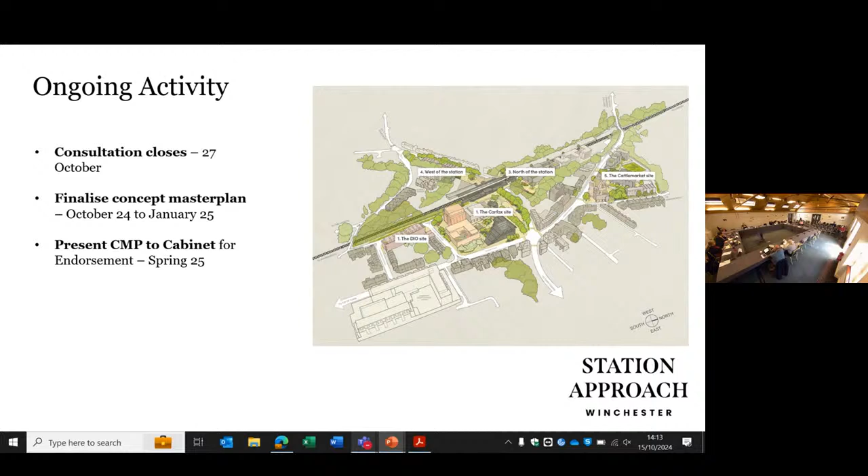So the consultation closes on the 27th of October. After that, we'll be taking full account of all the comments that have been made. I think we've had about 70 responses so far, and that was as of last week. We'll then be working with Design Engine to finalise the concept master plan in a format that will come forward via the planning team to a cabinet report for endorsement of the concept master plan in spring of 25.

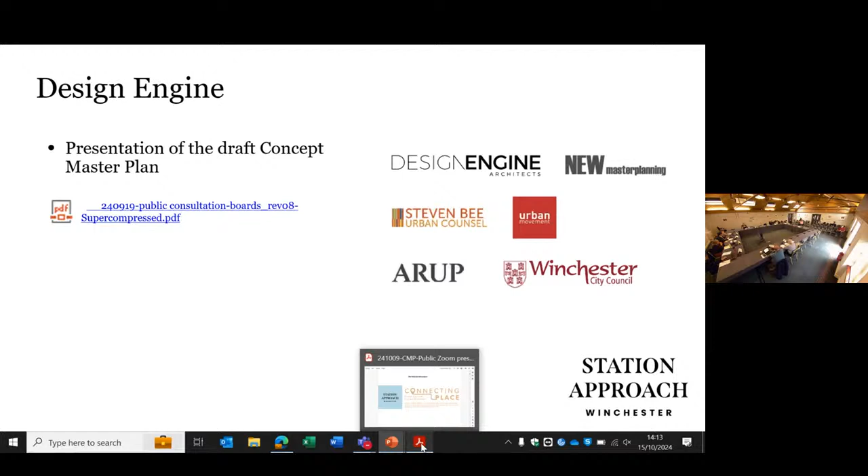Now I'd like to hand over to Oliver Moore from Design Engine Architects, who are the lead consultant. They are locally based, and I'm sure he can pick up on Councillor Lee's concerns and issues as well. Thank you.

Thank you, Ken. So I've got a set of slides on the screen here. This is effectively the same set of slides that were presented to the public Teams meeting just last week, so I'm going to skip over some of them since we've presented the baseline to this meeting before. So some of the background information in these earlier slides I can zip through.

The vision, though, I think the statement here is what this project is aiming to define: a connected place, a lively place to live, work and play, a welcoming gateway showcasing the nature of the city and beyond, and a sustainable travel hub. That, I think, is somewhat of a stretch goal compared to what the station area offers today.

This was capturing what's in the local plan. Some of those elements have been taken forward to inform that vision, but I won't go over that in this forum. And you are all familiar, I think, with the red line of the site and the areas within its demise and outside of its demise.

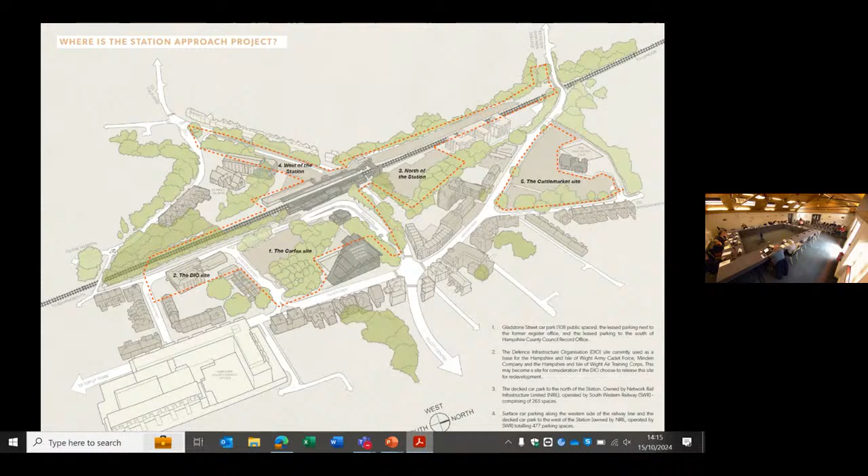What is a concept master plan? This was touched on in Councillor Lee's comments. It isn't a detailed design, it can't be for the sites. It is a broad framework, a set of development parameters and guidelines that will inform future detailed developments and future detailed planning applications, which will be subject to all the relevant scrutiny through the planning and development process as and when they come forward. It's also important that it sets a framework for the entire site, even though it's not able to define phasing or which parts of the site may come forward on which timelines.

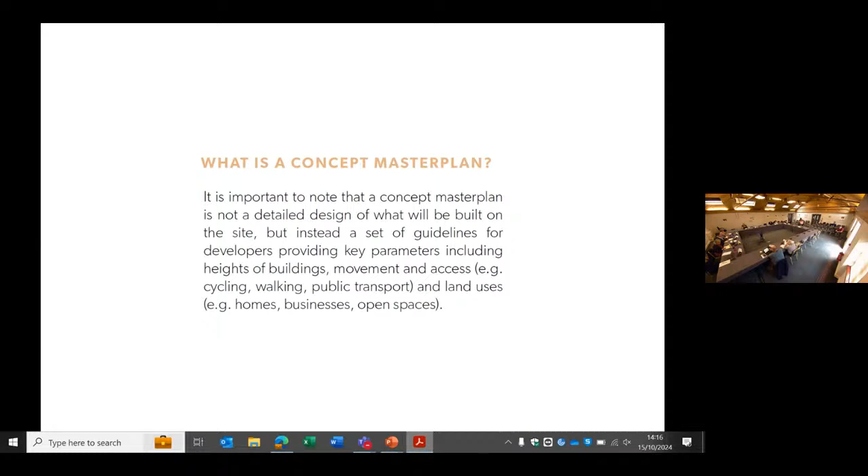That's subject to many other factors, such as viability, financial considerations and individual landowners' constraints moving forward. But it's something that sets a coherent aim for the whole area, which can hopefully be developed over time.

We didn't start from scratch. We continued work. As Ken said, the public consultation done back in 2022 sought, and received, over 90% approval for these four key development principles and the sub-principles beneath them. These have been our starting point for the themes and the proposals we present today.

A little bit of context, but I won't dwell on this. Obviously the station is in a key position within the city, more so today even than when it was created, when it was somewhat on the fringe of the city centre. It's now a key dividing location between where people live and where people travel into, in terms of the economic centre of the city. And obviously, notwithstanding COVID, there's increasing commuting in and out of the city to jobs elsewhere compared to when the station was built.

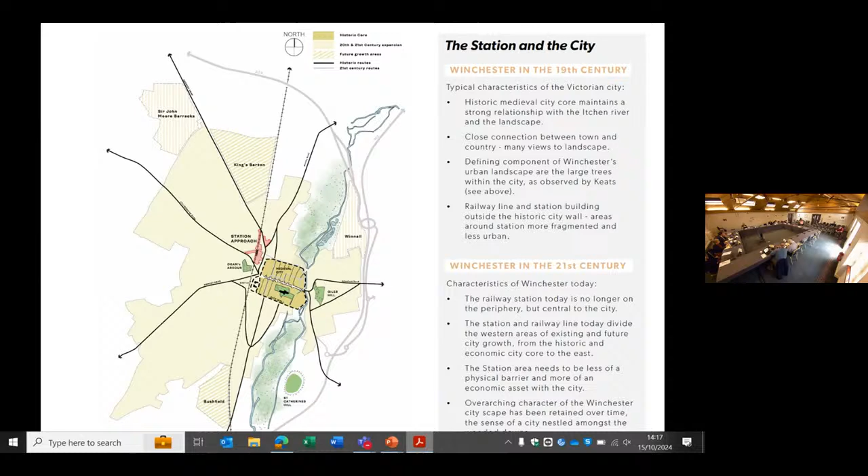Just going to pause on this one: the key characteristics of Winchester. This is something we've really drawn as inspiration for some of our town planning principles and the way we've laid out buildings and development on the site. It's not just Keats who's recognised this, but this is a quote we thought was quite apt and succinct. Winchester feels today, and it was observed in the past, as a town nestled amongst the landscape and natural environs, and that's a real key characteristic.

You look at many of its streets, some of the trees, some of the green spaces within the city, and that's something we want to identify - there are strengths and weaknesses within the existing site of the station approach area, but it's something we really want to reinforce. In doing so, we hope to reinforce that sense of what the nature of the city of Winchester is, and also simultaneously better knit this area, which isn't that characteristic of Winchester, into the city centre itself.

So, to the draft proposals of the concept master plan, organised around six key themes: arrival, the experience of arriving at the station, or arriving to or leaving Winchester for daily commuters, visitors, residents, and people new to the city.

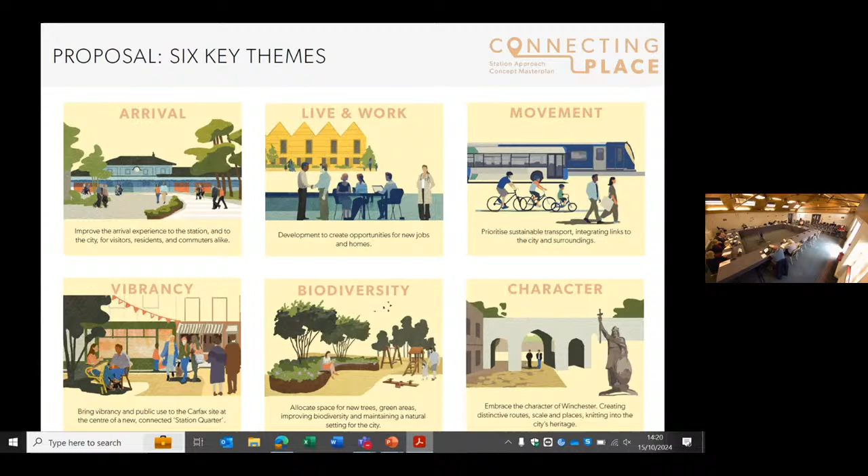So taking each of those in turn: the current experience of arriving into the station, I think we can agree, lacks some quality of experience and somewhat lacks identity. The number of times I've been asked, working and walking through the site on an almost daily basis — where's the city centre? How do I get to Winchester? Where do I find the cathedral? So arrival and orientation is clearly a key issue.

How are we addressing that? We've identified the key arrival points, the landing spaces if you like, and also the key routes that move beyond those and into the city or outwards into the local neighbourhoods.

So without going through this diagram, which is within the public consultation material you can find online — there are opportunities to enhance existing arrival spaces, and opportunities to create spaces where there probably isn't much identified space currently. I'm thinking about the west of the station, for example, where car parking and car movements have encroached. There really isn't much space there at all.

And again, in that vein, the northern area, where there's currently a viable route into the station for people to arrive and depart, but there's no sense of space or location there — you're walking through a multi-storey car park.

And there are other aspects on this diagram about routes that link to those, the quality of those routes, and some of the features along them.

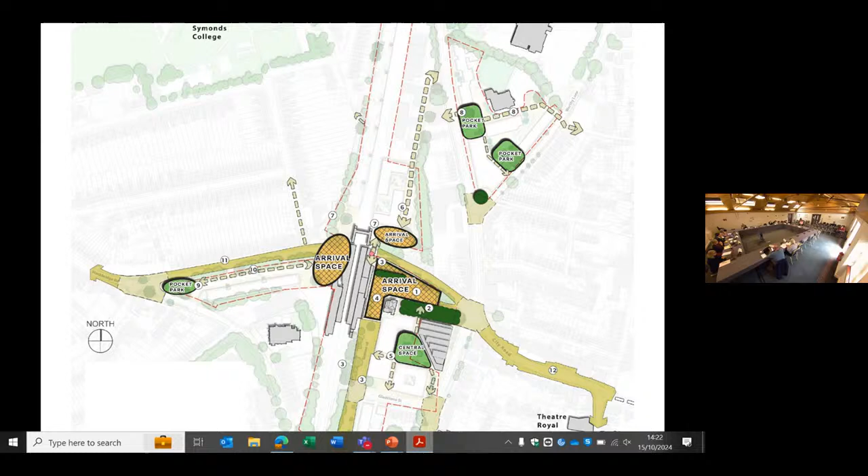And that goes for the Cattle Market site as well, which is somewhat of a green space vacuum. We can introduce new uses into those — I'll come back to this in the biodiversity slide — to better improve the amenity and the identity of those routes.

The emphasis would be shifted, as will be covered in the movement slide again in a minute, asking all the different user groups to take a step back, changing the priority of space here to be more pedestrian friendly, a more usable public space for pedestrians, limiting access for vehicles. Buses would be allowed on a shared surface with pedestrian priority. Taxis and other private vehicles would be redirected or contained elsewhere, not allowed to pass in front proximity of the station, creating potential space for more pedestrian friendly, civic and public use as an arrival space for Winchester, supported by reuse of new and existing buildings for cafe, bar use, and pop-up space. Any of those could be developed within the detailed principles for the site opposite on the Carfax.

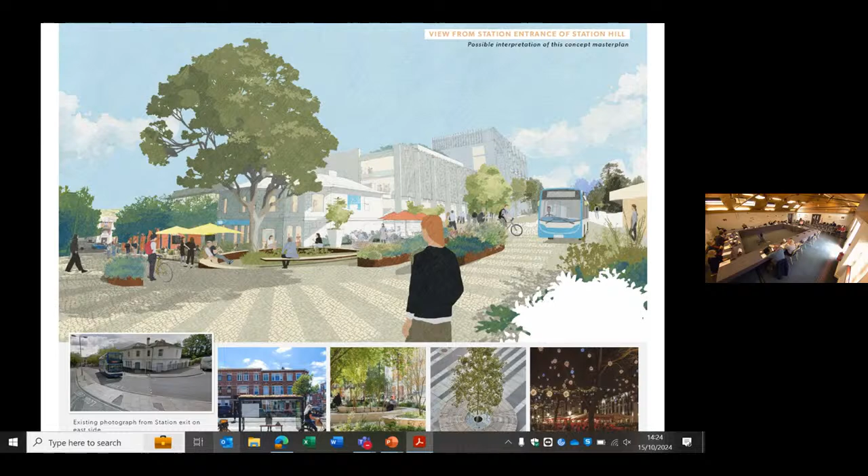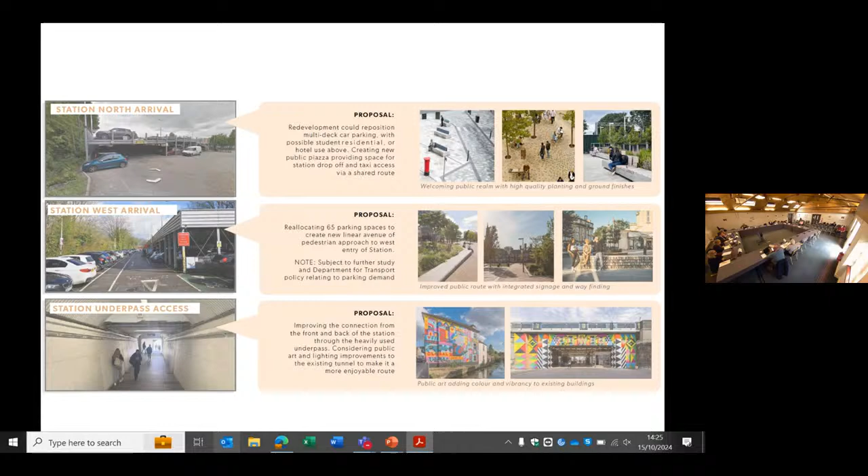We don't have visuals for all of the approaches, but there's a similar kind of principle for improving the quality of the other routes into the station - Station North through the car park, Station West through the surface car parking adjoining the multi-storey car park, and also routes through the site. The underpass for people moving across the station site has opportunities to be improved.

Live and work - this is land use effectively, and these sites are identified in the local plan as offering development opportunity for the benefit of the wider city, to bring value to the area with new flats, houses, and opportunities for different types of workspace. So how might that be best arranged on the site? These are the principles that we've developed.

Taking Carfax site as a beginning, there's opportunity for viable retail here, whether it's a convenience store facing the station, a cafe, a bar, or pop-up market space on Station Hill. There's opportunity for workspace too, being in such close proximity to the transport links and bus, making it a very accessible space for people to move to work.

Some element of residential may well be desirable on that site, but really I think it's the site one step further away - so residential opportunities on the site of the DIO, bordering Gladstone Street and Newburgh Street - in the fullness of time, very much dependent on Network Rail's car parking criteria and what opportunity they have or might evolve in future to reduce their car parking quantum.

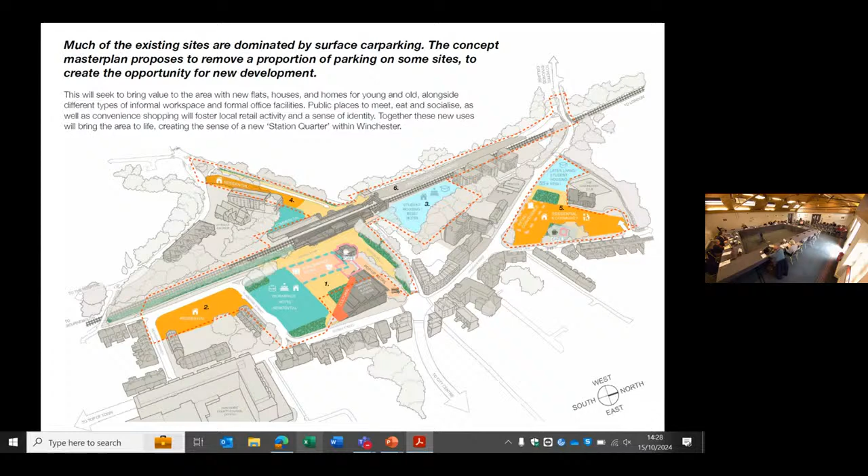Again, just the visuals - I won't dwell on this - but it shows that development along the Andover Road edge could offer a much improved access route into the station, both in terms of better framing the views in, creating the streetscape if you like, and the sense of coming into the city centre. I'll come on to this in the movement slide - setting back from the road in order to offer opportunity for better transport links.

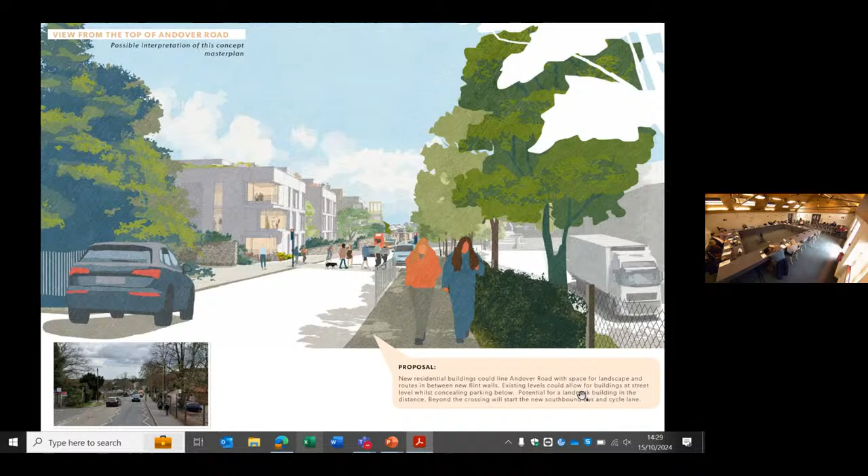A view of the site from the upper Andover Road area, looking back towards the Carfax site there.

This shows the improvement of the links, coming back to that arrival sequence - links running uphill from the station, pedestrian and cycle links through and over Upper High Street and down towards the Westgate. There's opportunity here with the red line, including the road, to widen some of the footways, improve cycling priority, and change some of the flow of cars in order to provide better, more accessible routes for people in terms of quality of space to get to the city centre.

Development, residential development shown on the right there on the DIO site, which could be in the form of flats, and potential office development in the area labelled A on the site, which shows the area of the Carfax site furthest away from other development at the moment and furthest away from the listed building of the records office. Might be an opportunity somewhere to increase mass.

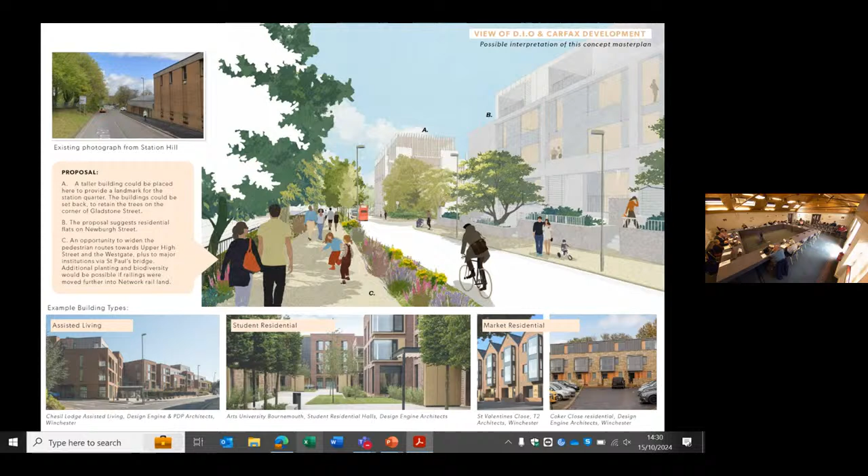Vibrancy is a key feature we'd be looking to inform the generation of a new station quarter, somewhere you don't just live or work, but somewhere people would dwell and stop and pause on their way to somewhere else, on the way through the city. Not a destination in itself per se, but something of a waypoint on people's routes, a reason to pause, and also in order to capitalise on some of the throughput of commuters and the economic potential of the area of the city.

This could be commercial use, but it can also be uses that are beneficial to the city. So we would suggest, prescribe, play parks, cultural uses, pocket parks, areas for public art, spaces for play, spaces for public amenity that might be open through the day and also into the evening.

All of this improves the dwell time on the site and the sense of safety and population, alongside the fact that there's opportunities for people to live and work there.

How these uses would be orientated on the site is quite key in terms of the identity of place and the sense of place. There's a diagram on the right here showing where the active facades would be, creating uses that look inward into the sites to create pedestrian friendly, car free spaces in the centre of developments.

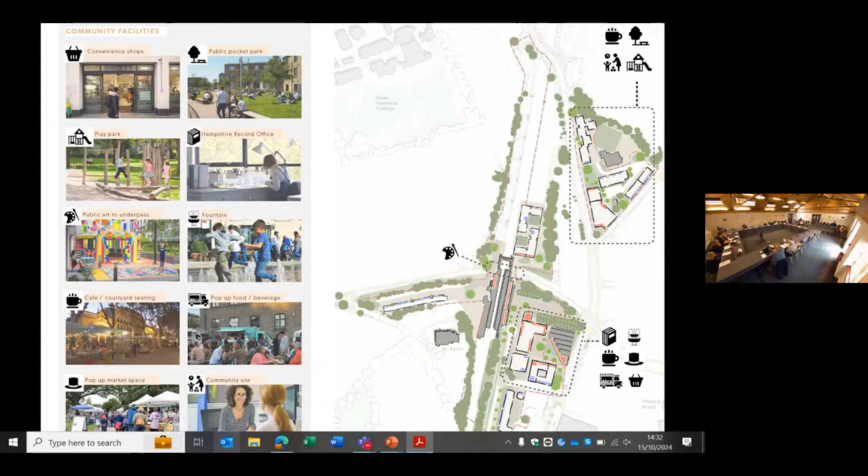So movement - how is the station utilised today, and how can that better support more sustainable transport links in the future? Data shows that the predominance of users arrive by walking. Car pickup is another secondary major use, and other uses like bus and cycling could be better encouraged.

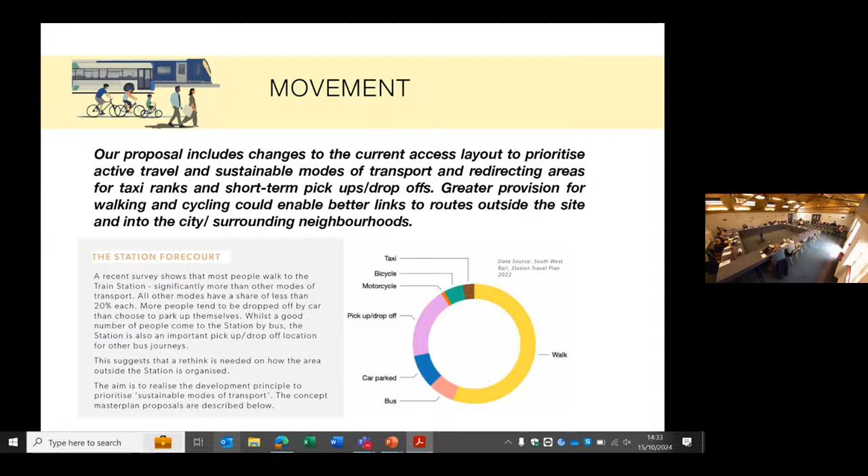This is a diagram about the reprioritization of access and space use to the station here. This is the idea driven by our transport consultant and urban planning principles, borne out in many examples in the UK where stations have been redeveloped.

Good places, good arrival spaces, good public forecourts to stations are ones where you address the impacts of 20th century development, where cars have become increasingly the dominant factor, encroaching closer and closer to the station entrances. This asks everyone to take a step back and then put provision back in a sort of ordered hierarchy - space for people would be paramount, space for people to park, access, move on cycles would be secondary, buses and larger vehicles obviously third, with greatest proximity to the station.

Taxis would be next in terms of moderating the distance and how close they can get to the station entrance, but still providing them in that hierarchy ahead of public vehicles and public drop-off in terms of access to the site. Limiting or eliminating access for public vehicles, private cars that is, with the exception of those with accessibility needs, to access the very front of the station, and providing more viable and improved drop-off and accessible parking spaces in these purple areas, which is each of the car parks, of which actual walking distance to the station platforms and ticket barriers is as good as or very similar to the locations at which cars can access today.

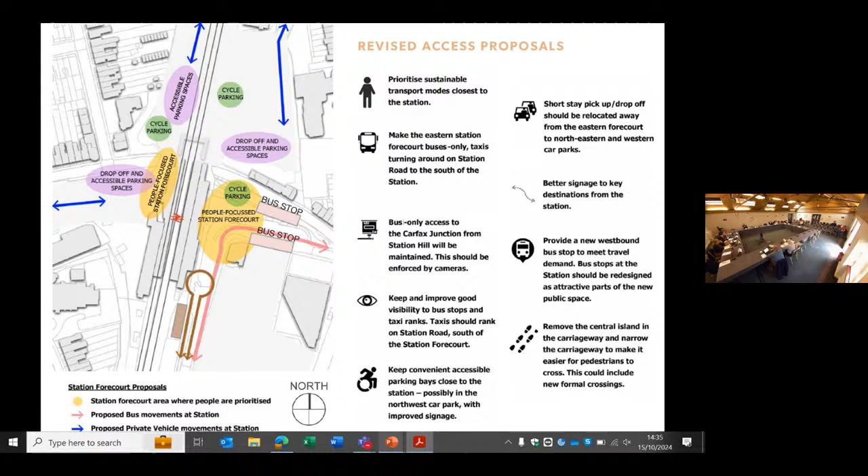I won't go into some of the other points on that for time.

Connectivity into wider transport routes across the city. There's a couple of points I'll pick up here. For example, the cattle market development can look to reinforce an informal route for cyclists and pedestrians that crosses it today. There may be opportunities to introduce a new crossing across the road there. That's something that sits outside of the red line, so we can't prescribe that as a concept master plan, but it's something we're looking to encourage and facilitate with the layout of the site as it is today, which would be opposite Tesco's.

The red line here shows the opportunity that Hampshire County have looked at on Andover Road for future bus priority lanes, which might help park and ride developments to the north. We can't prescribe that within the public highway, as it's outside the red line, but setting back the development within the red line on the cattle market site in order to future-proof and enable that ability to put a bus or cycle lane in on the Andover Road side is something that we think would be an important move within the concept master plan.

There's opportunities in the long term here to look at the way that the Station West car parks are accessed. That might be limiting some of the access off of Stockbridge Road or supplementing it with other pedestrian, cycle, or even in the longer term car parking routes that might link to Andover Road. Again, that's recognising that there are developments north of the city that might increase the demand for access to the station from that direction, also looking to relieve traffic flow through the Carfax junction.

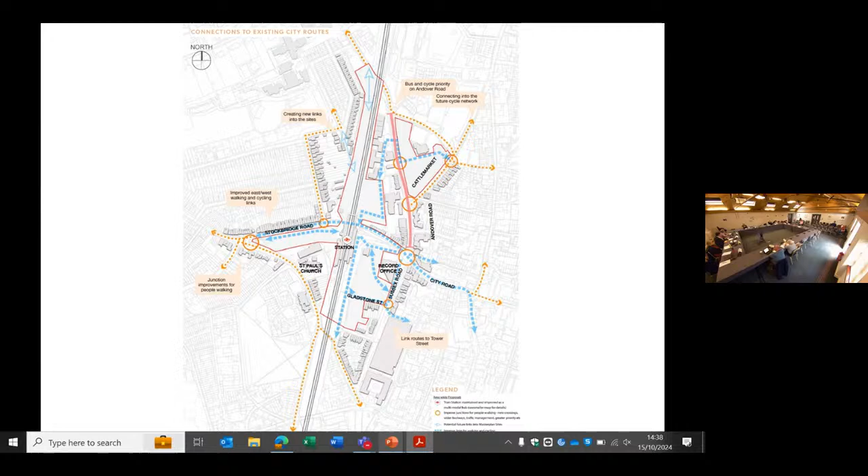Biodiversity. So the station area has some features which are typical of Winchester's urban landscape. There's a number of mature trees and lines that exist along roads and also railway lines. Our core proposal is to try and retain these key wildlife corridors and areas of biodiversity, areas of greenery that offer views and the sense of the city as you move around the station area.

Retaining these wherever possible is marked on this diagram with the large green arrows which show those avenues of trees, and supplementing them with improved green provisions within some of the hard landscaping spaces within the Station Hill area, within the West Car Park area, and some of the access routes where it might be possible to remove car parking and improve space for people and pedestrians, supplemented by planting and biodiverse planting, as well as improving some of the existing undergrowth and supporting those existing wildlife corridors around those trees.

It's hard to get away from the fact that the Carfax site does possess a number of mature trees, quite a number of trees at the moment, and development on that site is going to inevitably lead to the removal of a number of those. Offsetting and replacing them, and indeed achieving the 10% net gain as mandated, is going to be a challenge that needs to be looked at in terms of how the sites are phased on a site-by-site basis, or even a phase-by-phase basis.

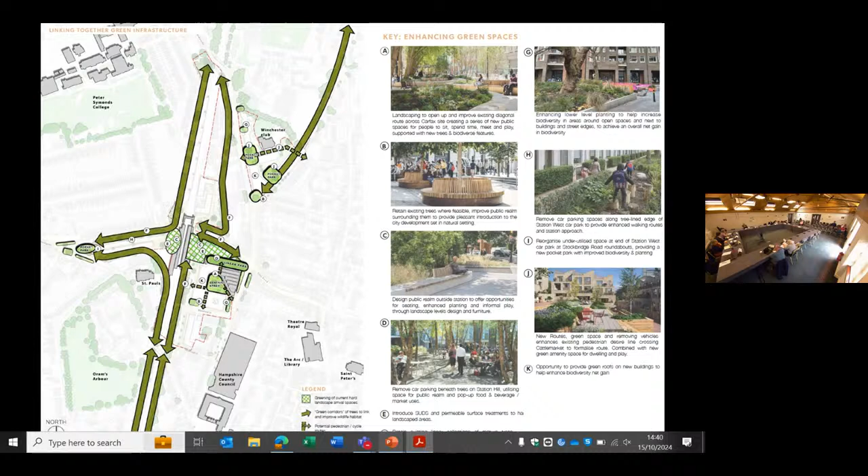So this is a view, again very much illustrative of what could happen, but the opportunity to take the centre of the Carfax site and re-landscape some of the levels in order to provide more usable space, more identifiable space, a place, if you like, for people to sit and dwell, but also to furnish that with as much greenery and biodiverse planting as possible, creating opportunity for quality space for nature amongst the new development.

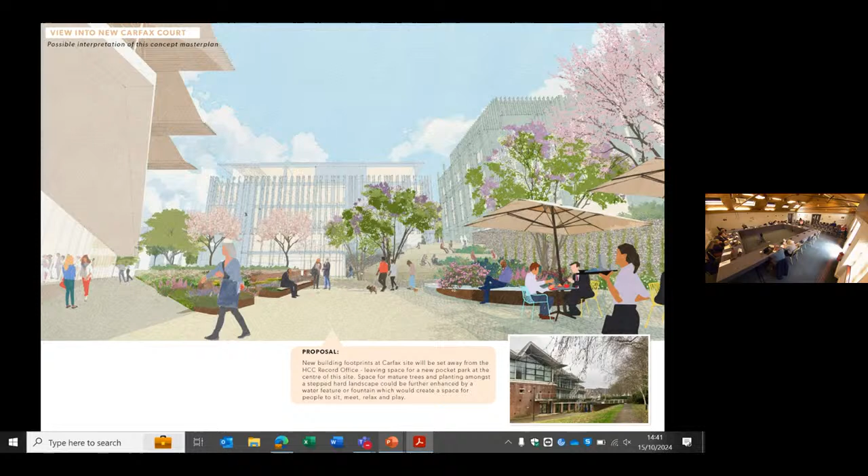Similarly, a view of the park off of Andover Road, so this would be opposite Tesco's, and that might be supported by, as I said earlier, a new crossing that crosses Andover Road at that point and reinforces that pedestrian and cycle route across the site that exists informally today.

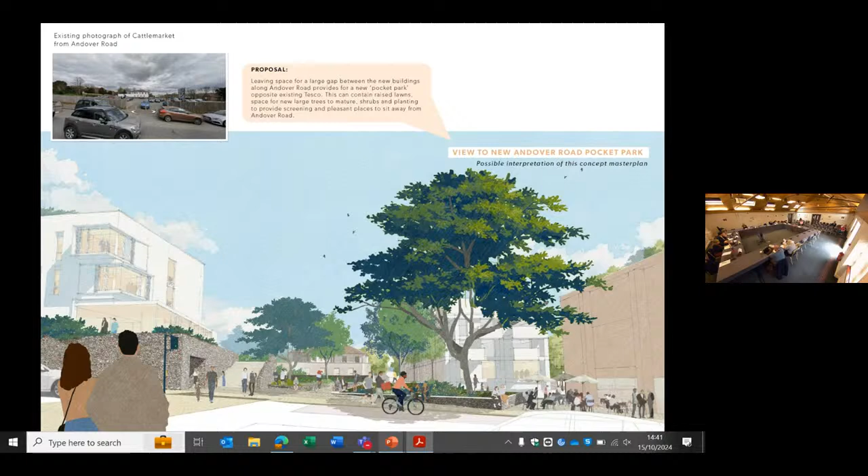Character. The station is an existing landmark in the city, but whether it's one that complements the town centre and the feeling of Winchester is something to be debated. I think Stephen B would offer, from a heritage perspective and a planning perspective, that there isn't much about the station approach area that really reinforces the character of Winchester.

And we set off as architects and urban planners and our team to think about what are the key characteristics of Winchester that we can look to introduce to address that. I feel Winchester is, if you look beyond the styles of the buildings, which are somewhat typical of other towns in the Hampshire area of similar ages, there are some key urban movement characteristics of the types of spaces, the alleyways, the spaces that open and close, the way that you get a series of spaces and size of spaces and views as you process through the city.

It's quite a permeable city, the blocks in Winchester, certainly the older bits, the bits that you would say embody the character of Winchester. So that sense of being able to meander through and discover spaces and views is something that we'd like to embrace in the development parameters for this site.

How to do that? This is just a kind of, not stereotyped, but kind of exaggerated example here. So on the left is a very dense, rectilinear urban block placed as close as they can together to just provide physical access between them, but very little quality of space in the routes between. The proposal instead would be to stagger, set back and fragment the development in order to create squares, spaces, routes, places to sit - spaces, if you like, rather than routes between the buildings.

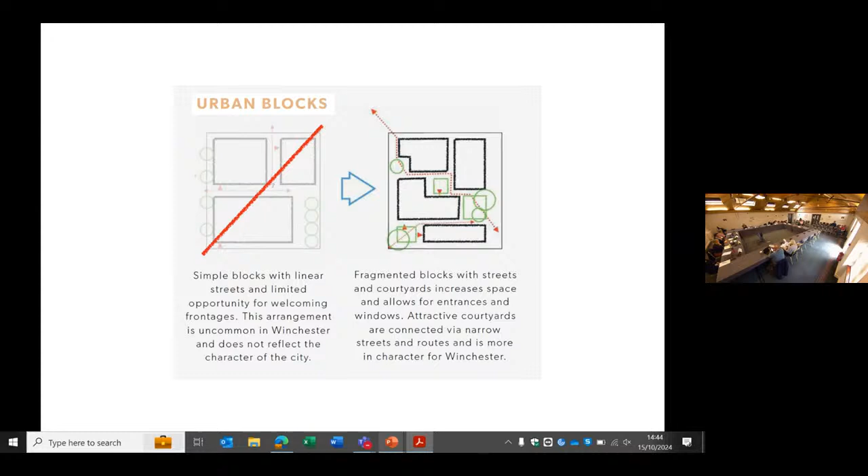Greenery and nature in Winchester. We think that, drawing on that quote from Keats at the beginning, the sense of nature amongst the development of Winchester is quite evident. There are some really glorious large trees which pepper the city's landscape, and almost - there's always exceptions - but a large majority of the streets don't have buildings on both sides; they have buildings either facing a green edge, a verge, a row of trees, or heavily punctuated by really mature trees that dominate or provide a viewpoint, if you want to notice them, to the streets themselves.

And that's a key character we want to reinforce in the development. We're conscious that a lot of these trees are quite old, over 100 years old, and some are within public ownership, while a lot are within private gardens.

So there's no guarantee for the city that these will prevail or be replaced. We feel it's incumbent on large developments, and the station approach area is one where we can identify areas for new planting of significant trees that can grow to maturity and mimic some of these characteristics we see around the city streets.

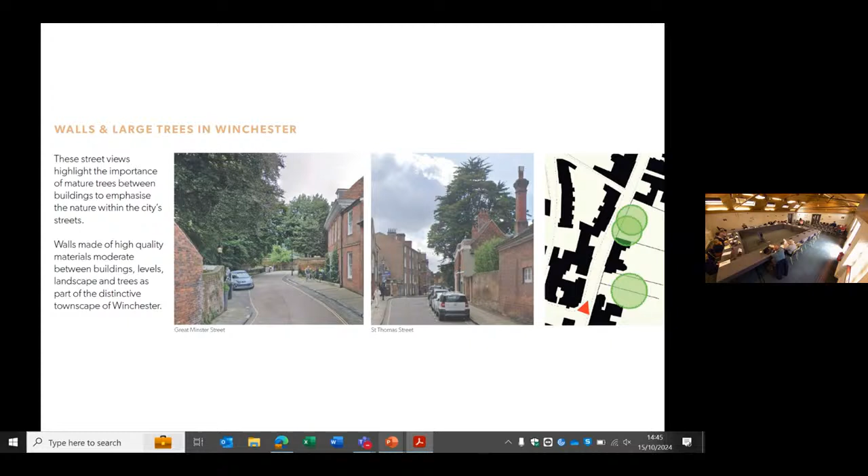So that diagram is somewhat stereotyped, but it's about varying that street line, creating spaces, so you're not just squeezing small trees between buildings and the roadway. You're setting back buildings at certain points along the streetscape to create space for planting, space for entrances to be set back, space for greenery to address the street, and space for trees that are visible to the city, not just to the residents of the site.

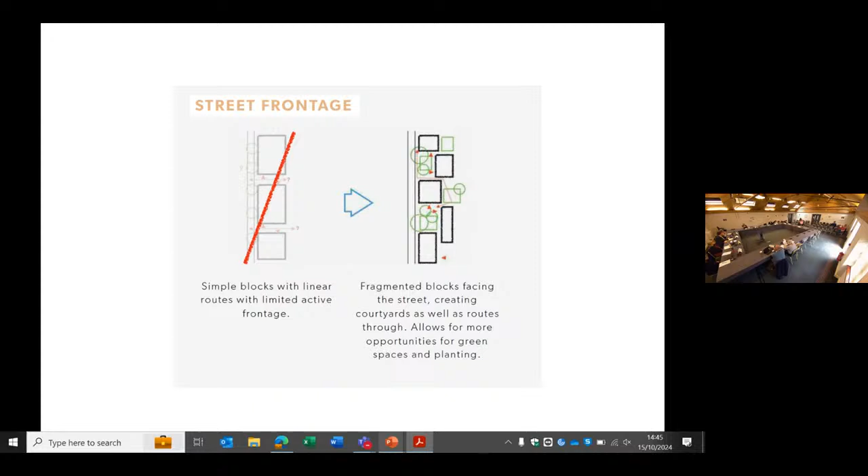So how do those principles play out in terms of mass, heights, scale, density?

You can't get away from the two or three factors we've woven together here, which is the need to achieve biodiversity net gain, which has become mandated since some of the previous developments on the site. So the quantum of footprint on the site is going to be different in the way that space is built and distributed.

Our approach, drawing on the principles we just discussed about creating permeability, is to limit the footprint of buildings on the site to create spaces between places between buildings, reinforcing routes across the site. In doing so, to provide the development and the aspirations within the local plans, you necessarily require an increase in height across the site, sometimes increasing above the guidelines within the local plan, which suggests 3 or 4 stories as a kind of datum.

The concept master plan would like to suggest that that is not inappropriate within the constraints of careful planning considerations for buildings of quality and good design, looking at the location of landmark buildings or additional height as being appropriately positioned on the site.

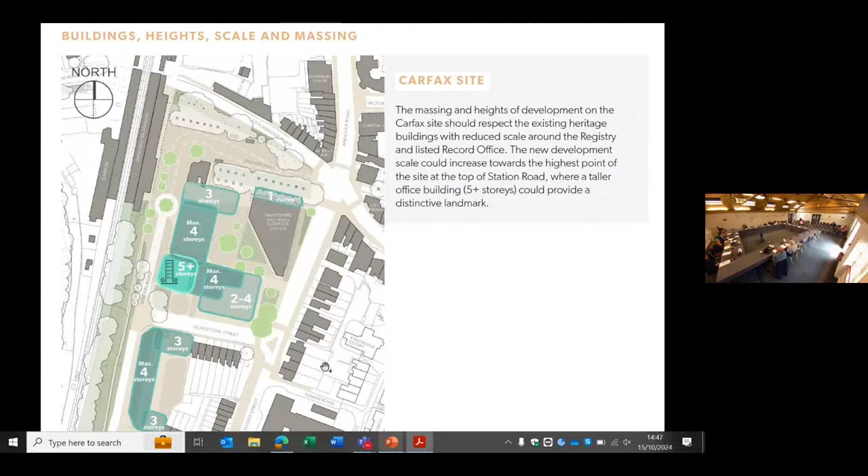For example, on the Carfax site here, we're suggesting that's furthest away from the Hampshire County Archives Office, which is one of the listed buildings, and furthest away from some of the existing residences that border the site and look onto it.

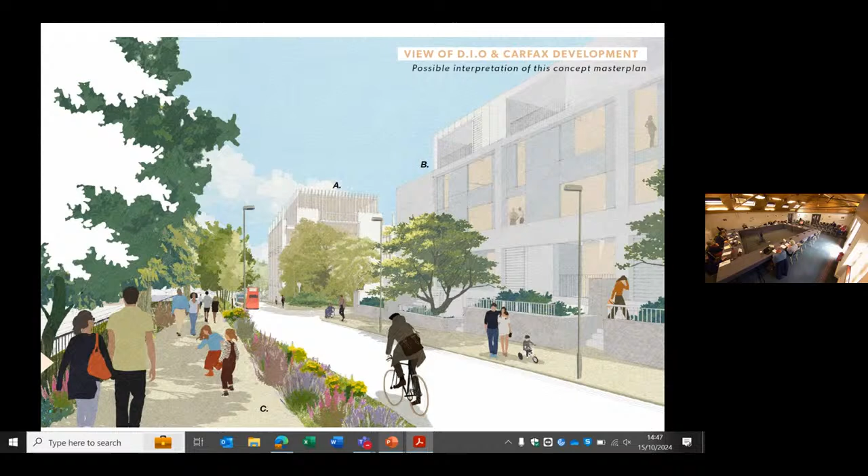This is just a view looking at one of those buildings that could be more than 5 stories, or 5 stories or more.

On the Cattle Market site, we would look to address buildings on Worthy Lane with lower rise buildings that respect the character of the Hyde conservation area there.

But conversely, we think where there are existing buildings of height and scale, many 20th century developments around the junction of Andover Road and Worthy Lane, that's a location where it would be appropriate to suggest higher buildings could be accommodated within the site. It's the low point of the site, if you like, so when coming down Andover Road, it's where buildings would have better stature if they have additional height.

And so in terms of the sense of arriving into the city and the pattern of buildings that line the street, we feel that's a good location for that on the Cattle Market site.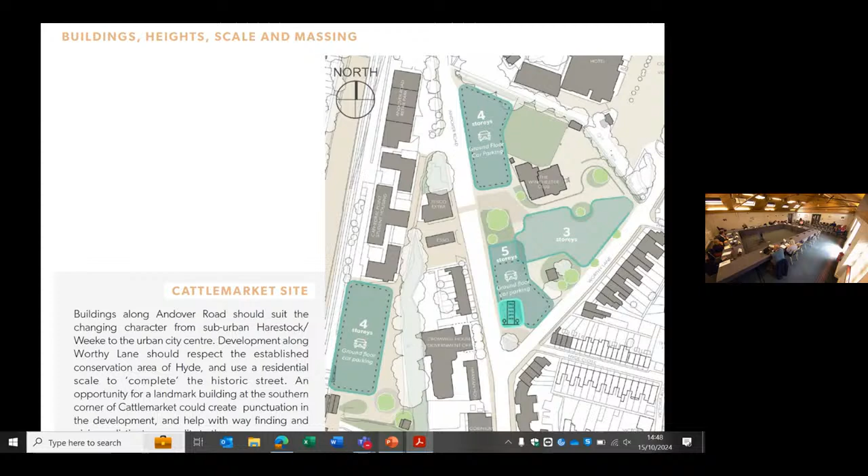So this is a suggestion of that. You can see in the foreground some of the 3-story buildings which might be facing the 2-story houses on the existing houses on the left hand side of Worthy Lane as you look towards the station. And in the distance you can see both development on the Carfax site and where a landmark building might provide emphasis and a variety of roofscape.

My colleague Richard, who has lived and worked in the city for many years longer than me, would be keen to express the idea that Winchester and cities in general, with new development, it's an increasingly secular society. The opportunity doesn't exist as much to vary the streetscape with spires and height that may have happened in the past, and all too often new development is set at a particular flat datum in order to meet development quantum.

We would propose or support a concept master plan that proposes a more diverse approach here, where pockets of height can be appropriate, offset by lower development elsewhere where it's needed to be sensitive to surroundings, such as this view on the screen.

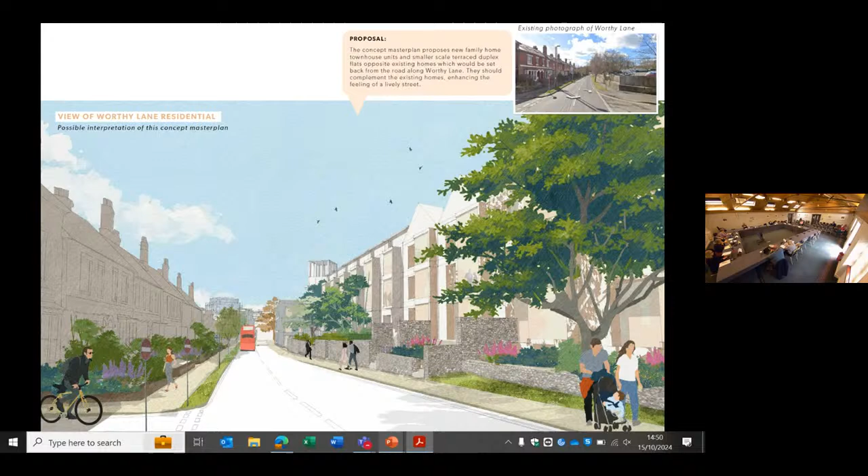As long as that height is achieved with design quality and appropriateness in terms of the views. That's not to say it's invisible from views, but that it offers something positive to reinforce the views around it.

Which brings us to the final set of slides: character and heritage impact. Now, I'm not a heritage specialist, but Steve B is on our team, who's both a local practitioner, a planner, and heritage advisor, having worked extensively within Winchester and nationally.

So excellent authority to speak on these matters. I'm paraphrasing him: he said the quality of heritage assets around, or certainly within the Red Line, is very limited. Around the Red Line there are some assets - we've got St Paul's Church, which is a listed building, and the station building itself, which isn't listed but has some qualities and heritage features that have survived over time.

We've got the Hampshire Records Office here, which is now a listed building, a 20th century listed building. And then we have the conservation area and the Winchester Club, which border the Cattle Market site here. We think the relevance of the Winchester Club as a heritage asset has diminished over time, with its current condition and setting having changed so much since its origination as a house within a large garden.

So there are numerous views to the site, which we think can ultimately be improved with new development, providing it's of suitable quality. We've also looked at the wider views around the town from viewpoints such as St Catherine's Hill, Blue Boar Hill, and St Giles's Hill.

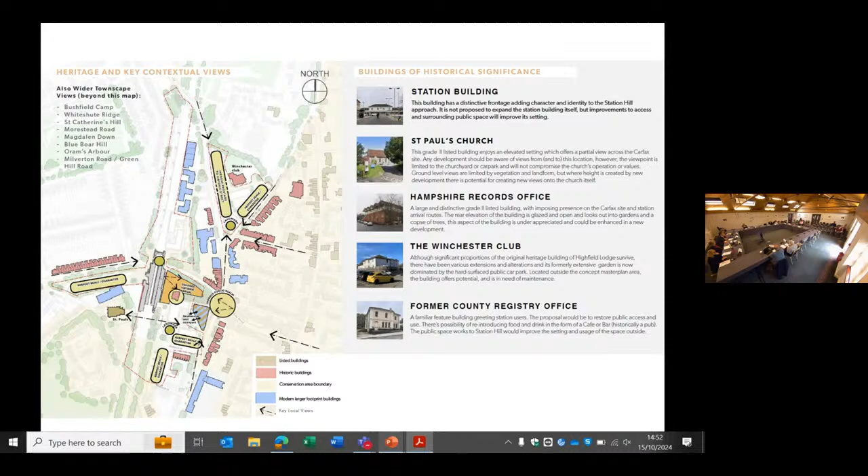This is an overview, really trying to show how some of those ideas could be visualised as building mass, as and when parcels of land could be taken forward, and how that would knit together to provide a coherent vision for the station approach area. I'll leave it there - the last slide was just about feedback and online consultation processes, which I think we're all aware of.

Great, thank you very much indeed. So quite a lot to digest there. I suggest we take it in sections. First of all, there was the short introduction by Ken Bakey, which looks at the process we're in. I don't know if people have any questions on that.

Yes, Councillor Godfrey - I'm not sure it was mentioned in my presentation. I don't know everything myself, but the number of people who use the station or station area doesn't seem to be well represented by 70 people giving feedback on the consultation. Should we be worried that so few people have responded to the consultation so far?

I think that's a fair question. Obviously, at the beginning of the process, when we were shaping the priorities, we had a lot more, but maybe Mr. Bakey can provide some perspective.

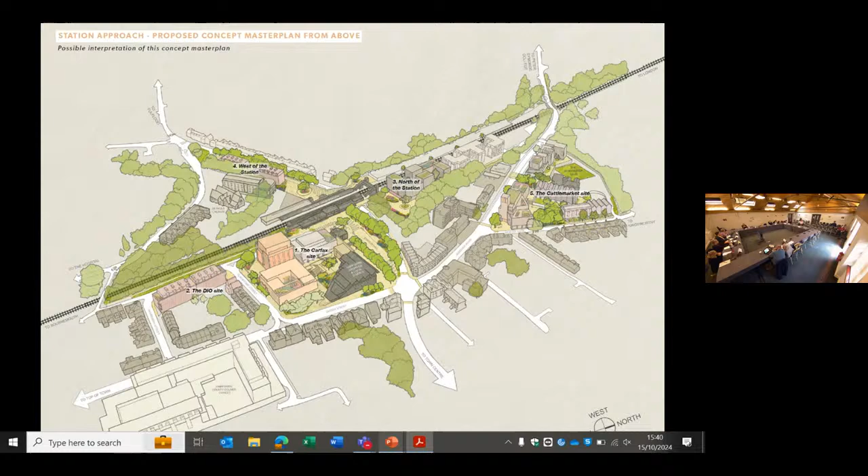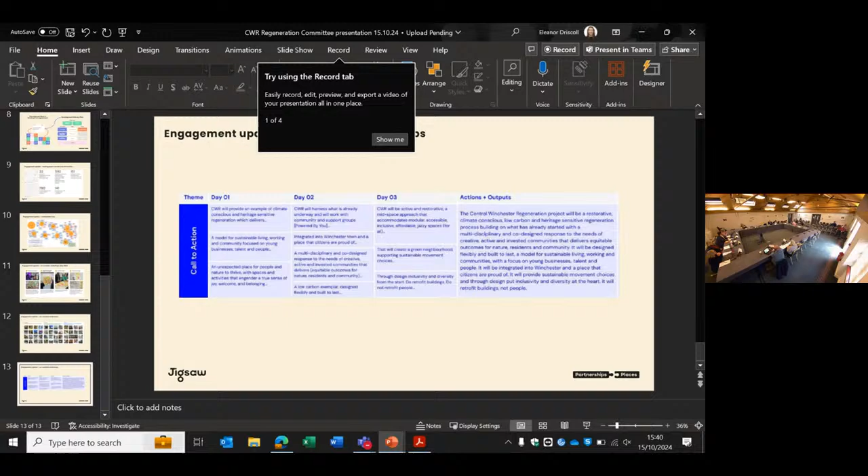So we have a few slides to go through, a quick update of status, and then as quickly as possible we'll want to move into Matt Walker's presentation. Matt's here from Jigsaw. If you could just kick off and get going on that, that would be great. Thanks very much indeed, thank you Chair.

I just want to give you an update, since it's been quite some time since we came and talked to you about Central Winchester, Friarsgate Park, and the Archaeology Day, and what's next in terms of ongoing activities for that key space. A brief reminder about the development delivery plan, the next key stage for us, and then I'll hand over to Matt to take you through what Jigsaw have been up to in the last 6 months since they last spoke to you.

So as I'm sure you all know, Friarsgate Park is now fully laid out. All the plans are in place, everything is there that we need for that area. We've got new seating areas, a platform for arts and cultural activities, soft landscaping with wildflowers, and much improved views of the River Itchen. It will serve as an outside community space, enhancing connectivity from Friarsgate to Broadway, while also improving biodiversity across that former hard landscape site.

We then had another family archaeology day, the second series of days for people throughout the archaeological dig going on in central Winchester. This was done with Pre-Construct Archaeology, who were doing the actual dig, and it gave younger people hands-on experience discovering, washing and analysing fragments of ancient pottery found on the sites. Two local businesses from King's Walk helped out with activities like pottery painting and tile design inspired by artefacts found on site. We had over 100 people attending, similar to previously, at the end of August over the bank holiday weekend, marking the end of a 6-week-long community dig. We've had over 120 community volunteers helping PCA uncover some of Winchester's archaeological history.